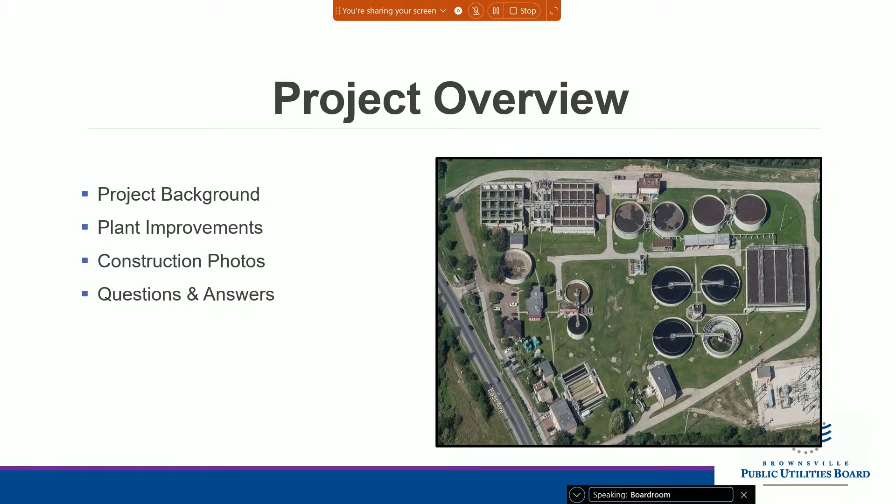Some background on the project: we had to get a good team to do these improvements and the design because it was a high dollar contract and it was critical for the treatment of our wastewater. So we got Freese and Nichols as our engineer of record. The contractor, Garney Construction, they do a lot of wastewater construction projects throughout the nation.

Freese and Nichols is a designer who does a lot of wastewater and water designs. We had DN Tanks do some improvements on one of our digesters that had a large vertical crack. Raba Kistner was our geotech lab on the project, and they did all the materials testing and quality assurance for us. Our inspector was David Betta.

The contract amount was $5.4 million with a contract time of 550 days. This project was funded by Oakland Union, partially funded by the Oakland Union Power Plant decommissioning.

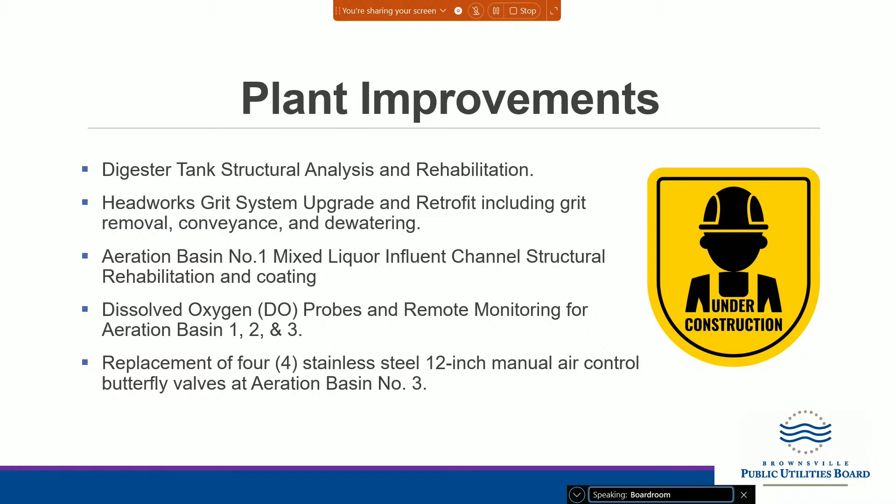The plant improvements included structural analysis and rehabilitation of one of our digesters. The headworks grit system was improved with additional equipment to improve grit removal. Aeration basin number 1's influent channel was starting to differentially settle, so we anchored it down with helical piles to stop that settling. In aeration basins 1, 2, and 3, we introduced dissolved oxygen probes to make sure the raw sewage and return activated sludge had the proper amount of oxygen needed for decomposition. We also replaced four stainless steel 12-inch manual air butterfly valves to shut off and open the valves for air introduction.

So here are some photos and the layout, again of the South Wastewater Treatment Plant. On the left you'll see aeration basin number 1, where we installed the dissolved oxygen probes, with aeration 2 to the right of it. In the middle is our headworks, which removes the large particles that come in through the sewer, as well as grit, which is sandy material, pebbles, and small fragments.

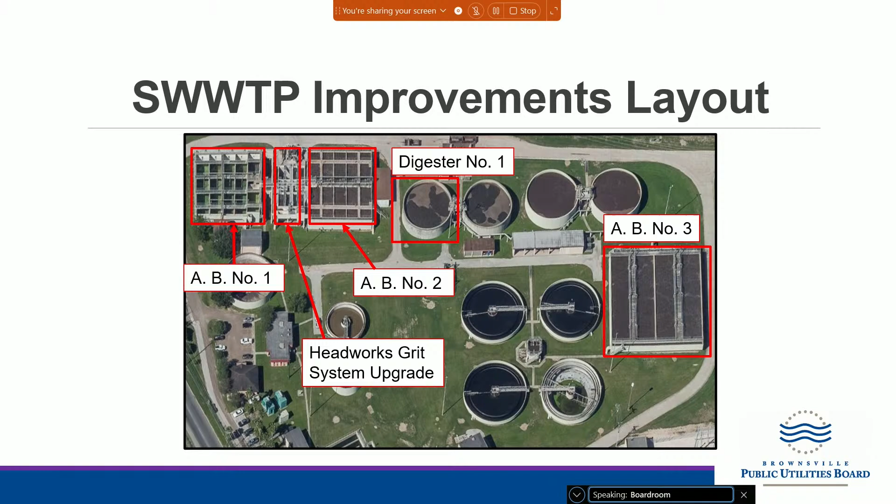On the right you'll see aeration basin number 3. Digester number 1 is outlined there. We have 4 digesters; only this one displayed that large vertical crack. That tank, for representation, is about 30 feet high. You'll see on the right this crack that was discovered a couple years ago—it wasn't like this originally. The contractor had to go in and chip out the concrete wall to make it larger, because you can't introduce small amounts of concrete—it's not strong enough and won't bond to the concrete.

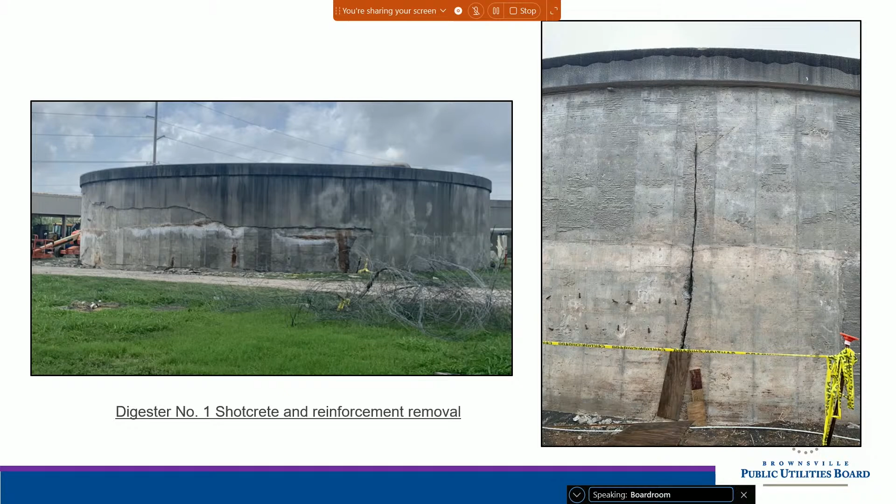On the left, they were removing the existing reinforcement, which were bands about 1/8 inch in diameter, spaced about 2 inches on center. This is what the designer recommended: about 3/8 inch diameter tendons, anchored on both sides of the tank and then post-tensioned. This is what's containing the tank from the hydrostatic forces inside.

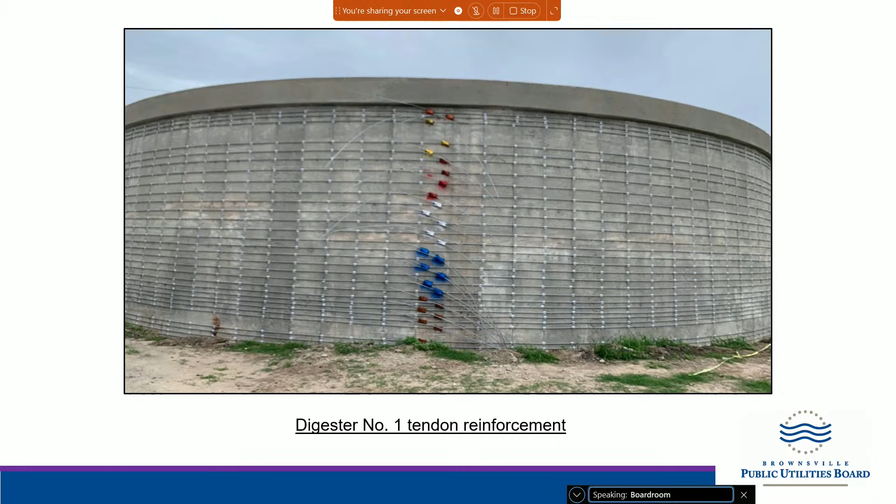This is our end product on the outside. After the tendons have been post-tensioned, it's covered with shotcrete and painted. On the inside, we had to coat it as well to maintain a good sound concrete.

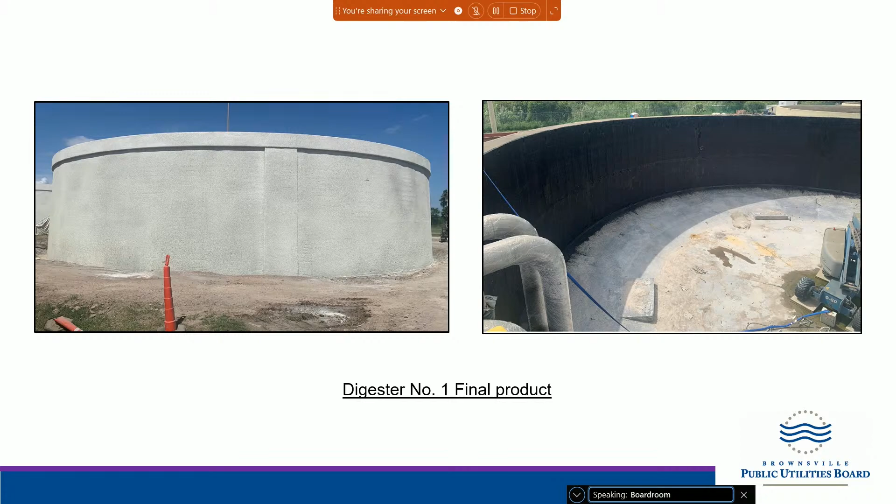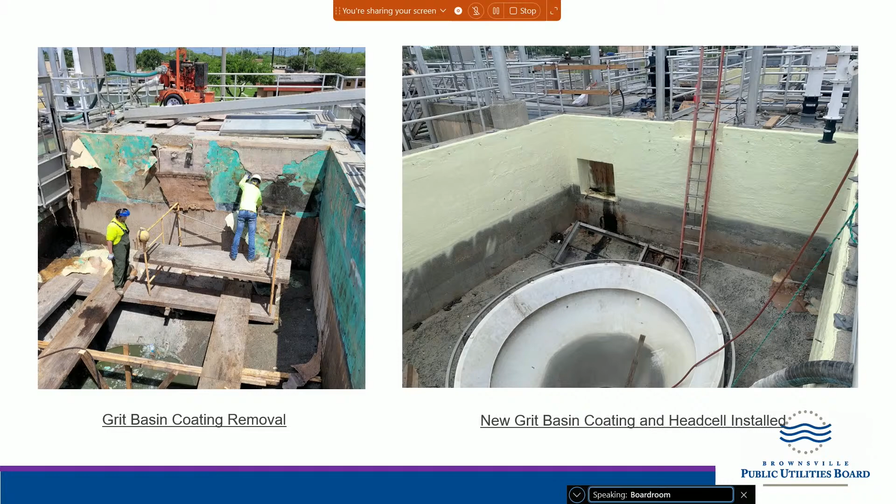This is one of the 4 grit basins. On the left, when we removed some of these water control panels, we discovered that the protective coating on the concrete was peeling off, so it was in real bad shape. We had to coat it, and you'll see it on the right side—about 1/4 inch in thickness. The white object in the center on the right is our head cell, which creates a vortex and separates the grit toward the center where it's then pumped out.

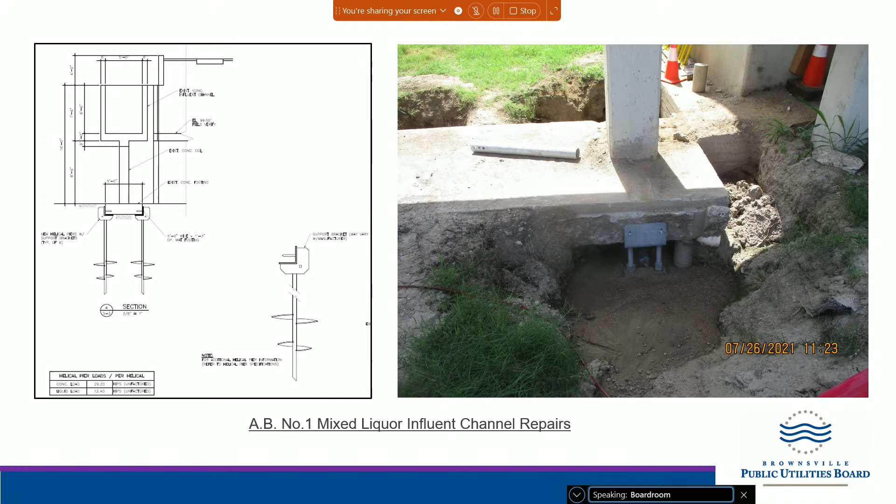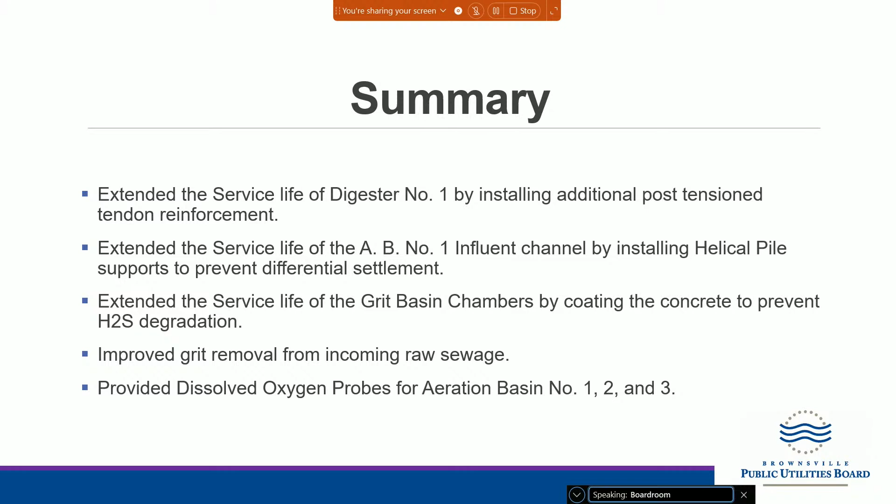In summary, this project, even though it was a high dollar amount, really helped out the south plant. It extended the life of many pieces of equipment—digester number 1 by 30 or more years, aeration basin number 1 as well. The digester now has about 30 years of extended life.

So, any questions? You said this took 2 years? The project was 550 days, from the time we noticed the crack. Was there any leakage? No, we noticed the crack a couple years ago. There was no leakage because the crack didn't go all the way to the inside, it was a superficial crack. We had to make it larger so we could put new concrete in, but there was no leakage. The reinforcement on the inside is fine.

So when you showed us the picture of those tendons, and then the final product, were those tendons taken out, or did they lay that concrete over them? So they put the tendons and then they shotcrete it, putting a layer of concrete on the outside that protects the tendons from corrosion.

The other question I had is, the engineer and the contractor, are they from the RGV, or out of the area? So Freese and Nichols are nationwide, and Garney, I don't know if they're from Texas, but they do work nationwide as well. They're both very reputable contractors and engineers.

Anybody else have any questions? Yeah, I've got a question. One of the last things you said was it extended the life by 30 years or more.

That's very important to the consumer. Hearing your report is probably at a level much more engineer-centric than mine. Is there an opportunity, excuse my language, but in Joe's six-pack language, that we could let the public know we have extended the life of -- you said you were on something, I'm sorry I didn't write that down, but I thought it's very important here. Extending the life of anything mechanical, anything that serves the community, for an additional 30 years -- there's a cost involved, but what would have been the long-term cost if we hadn't taken care of this? I think those things are real important, not just for this table and this committee, but for the public. I know the language there is at a level much higher than I am able to comprehend, and probably the average person too.

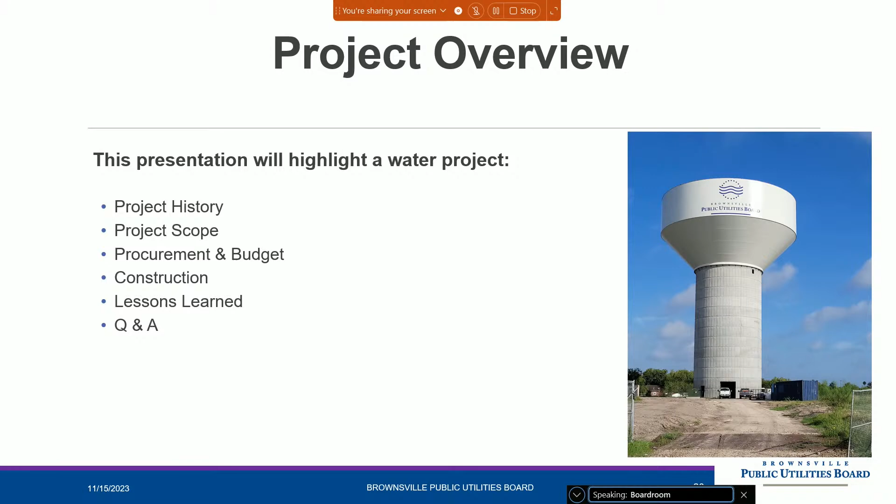The project overview today will go over some project history on our elevated storage tanks, project scope, procurement and budget, construction, lots of photos and a couple of videos, and then a few lessons learned on the project, as in any other project, and then Q&A, any questions you all may have.

Project history: as a lot of people probably know, the BPUB water distribution system has several elevated storage tanks throughout the city. We specifically have 4 elevated storage tanks, and back in the day they used to label them by numbers - EST for elevated storage tank, number 1, number 2. We continue to have the same sequence of numbers even though some of those tanks are no longer in existence. For example, we had the Southmost Elevated Storage Tank number 4.

That was the one that got demolished, and I'll explain more later. It had a capacity of 1 million gallons. We also have the UTRGV Elevated Storage Tank number 5, which everybody knows by the McDonald's as you enter the university. That also has a capacity of 1 million gallons storage.

Alton Gloor, EST number 6, is on East Alton Gloor close to the expressway, with a capacity of 2 million gallons. And Martinal Tank - maybe not as many people are familiar with that name - is located just north of our Robindale wastewater treatment plant off Central Avenue and FM 802. That has a capacity of 2 million gallons as well.

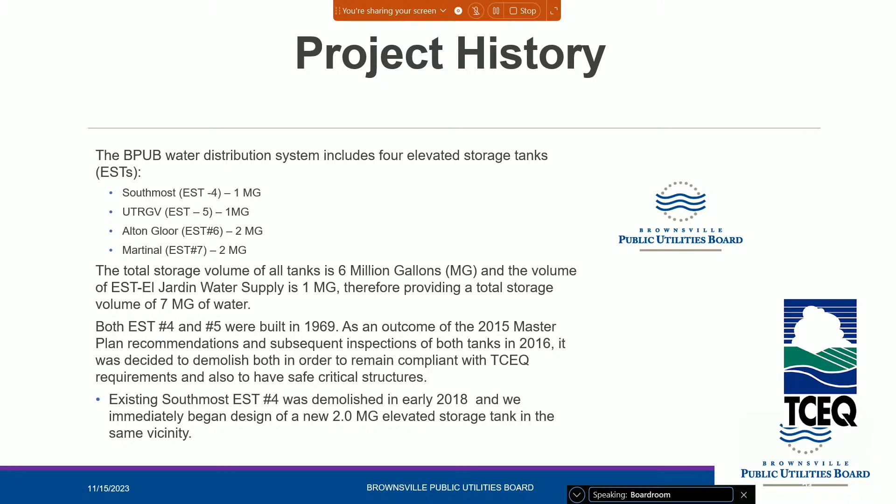And everybody asks about the UTRGV tank - one of the requirements by TCEQ is we couldn't demolish both at the same time. So the UTRGV tank is still up, but we need to begin plans to demolish that one, and we should be demolishing it by late spring of 2024. Nothing is going to replace it at that location, because the one we just finished constructing already replaces it in capacity.

To give you an aerial view of the tank locations - at the very top, the north end, we have the SRWA. That's a ground storage tank, flush to the ground, using pumps to push water into our distribution, versus an elevated tank which uses gravity flow to distribute water.

Alton Gloor is on Alton Gloor and the expressway, and the Morningside one is in the center of the page on the east side of the city. The UTRGV one is further south, and the one in yellow is the brand new one - the southmost 2 million gallon elevated storage tank.

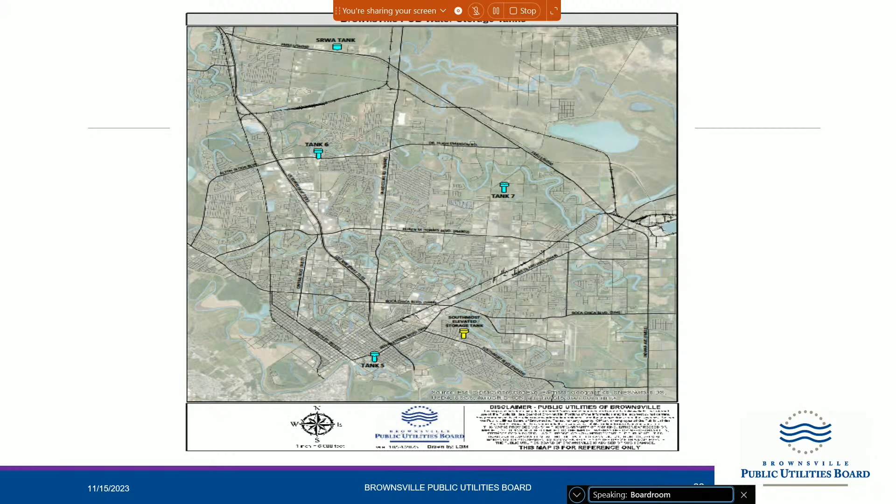This is the property we purchased - 4.4 acres, a couple blocks in along 30th Street from Southmost Boulevard, very near where the old one was. One benefit is we looked specifically for property nearby so the water lines needed to tie into our main distribution weren't too far away.

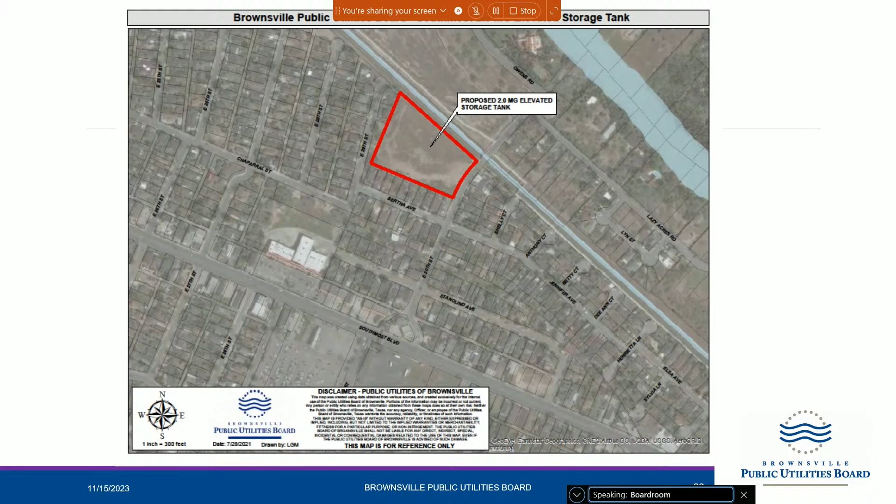This was the closest property that was really available - as you can see, the rest of the Southmost area is pretty populated. An interesting fact: this property was purchased from the late Judge Saravia, a longtime justice of the peace, who sold this property to the utility.

Procurement and budget of the project. This design team was the same as in Ricky's project at the South Plant: Freese and Nichols, Dunham Engineering, and Square E Engineering. Square E Engineering provided the electrical work, while Dunham Engineering provided civil site work and a lot of the welding and structure.

Testing - the project was bid on July 21st, 2021, coming in at $5.782 million by Landmark Services. Landmark Services has, for many years, constructed lots of elevated storage tanks throughout the nation. They're housed, I believe, in mid-Texas near Dallas, but they build tanks everywhere.

They actually built the one on our Morningside tank as well. The project timeline was originally 1 year and 4 months, and we gave them an additional 10 months due to scope of work that we added, which I'm about to go over.

Change in scope of work is done through what we call change orders - changes in the contract amounts. Originally this project was not designed to have an active mixing system - none of our other tanks have this. This is a more modern approach, as an active mixing system continuously keeps the water fresher by agitating it inside the tank.

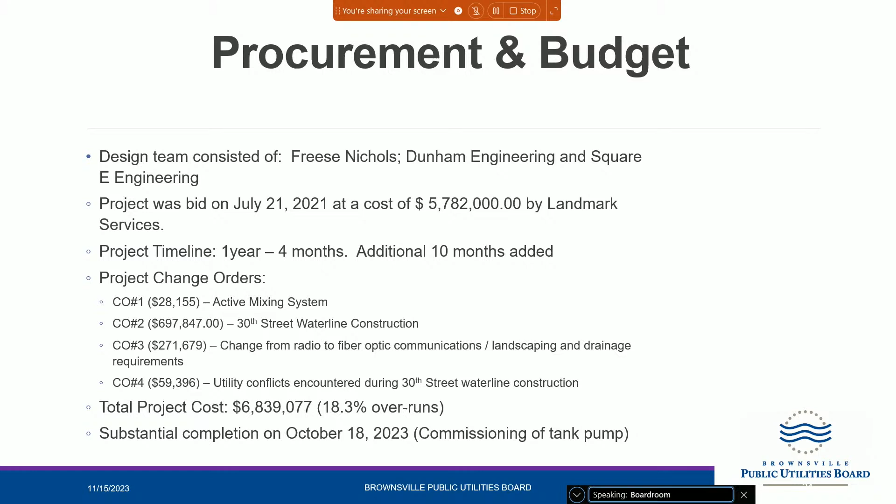The lead construction managing team, of course, was Freese Nichols. I served as the project manager, and the project inspector was David Vera. Many departments had to be involved, including BPUB. The larger groups were the SCADA group, the electrical transmission and distribution, and our water wastewater operation.

Crews brought in the fiber from the South Wastewater Treatment Plant. The fiber travels aerially from pole to pole, and when it reached our property, it went underground all the way into the tank. Of course, there are lots of departments involved.

A big one was purchasing. They assisted tremendously - when we were doing the water line along 30th Street, that's when PVC was in a huge shortage of pipes and fittings. In order to save time and not delay the contractor, purchasing assisted us with obtaining the PVC pipe.

You're going to see a map showing numerous traffic control points, lots of roadway closures, and lots of notifications for those who lived in the area. The PR department played another big task in putting out notices to the public, and of course the financial department assisted us with the funding and so forth.

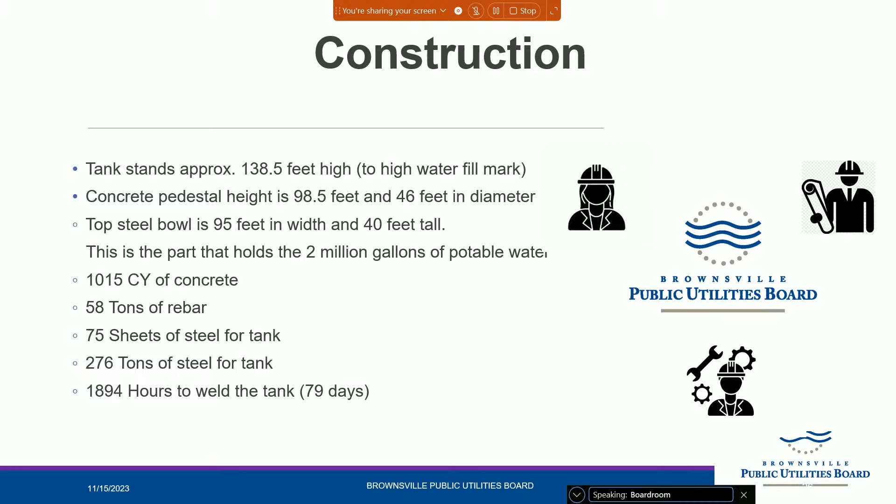The tank stands approximately - let me go to the next slide so you'll be able to see this view instead. This is a concrete pedestal. The pedestal is the trunk of the tank. It's hollow, you'll see photos of it as well. Basically what holds the 2 million gallons is that top portion, or the bowl as we call it. That top portion is made of steel.

The overall tank is measured from the bottom to the high water mark. The high water mark is right above the welcome sign. That portion of the structure is 138.5 feet tall. The concrete pedestal portion is 98.5 feet tall, with a diameter of 46 feet wide. The top bowl that holds the water is 95 feet wide by 40 feet tall, and that's the part that holds 2 million gallons of potable water.

There were 1,015 cubic yards of concrete poured, 58 tons of rebar, and 75 sheets of steel for the top portion of the tank. All of the steel totaled about 276 tons, and it took about 1,894 hours of welding, which is pretty much like 79 full days of welding on the tank.

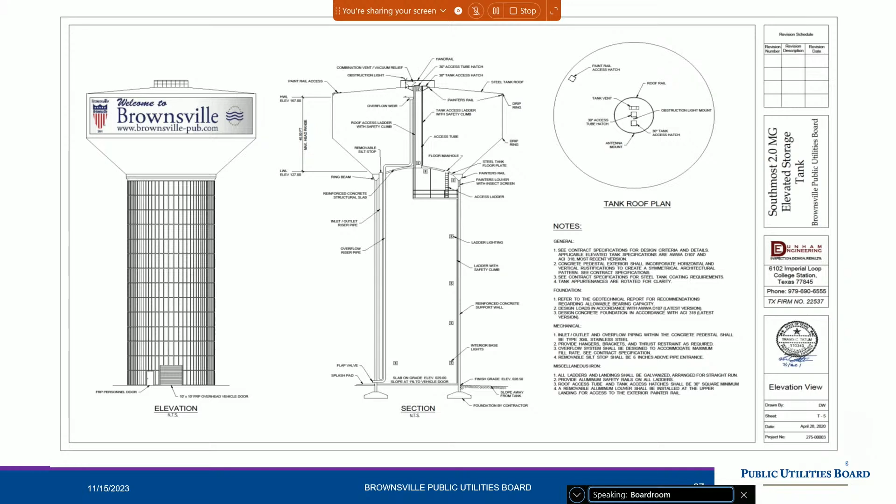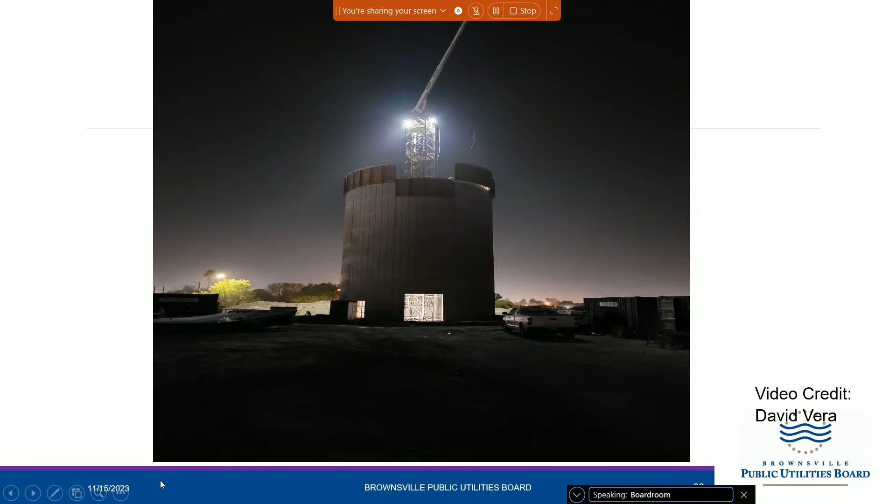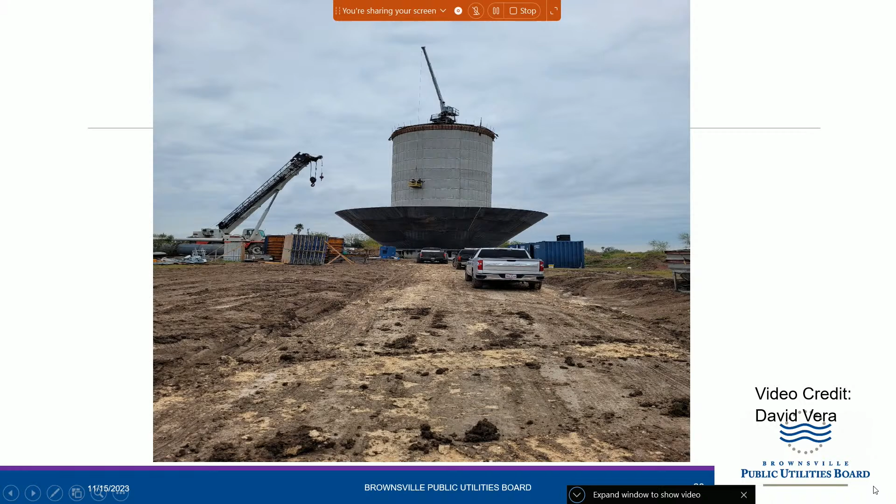Now I'm not sure how to play the video. Oh, there we go. I think we're having... but the volume, remember? Still a little bit high? I think it worked last time, they were able to do it. No? Okay, we'll go without sound. Technical difficulties, let me see.

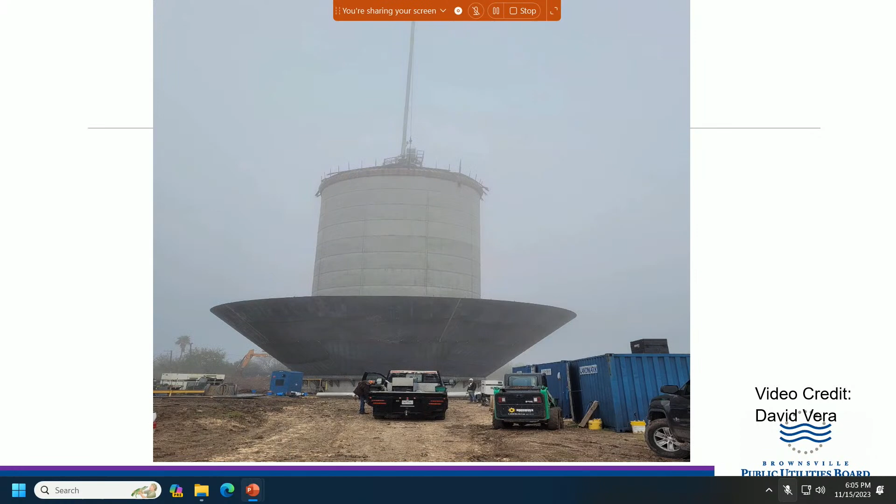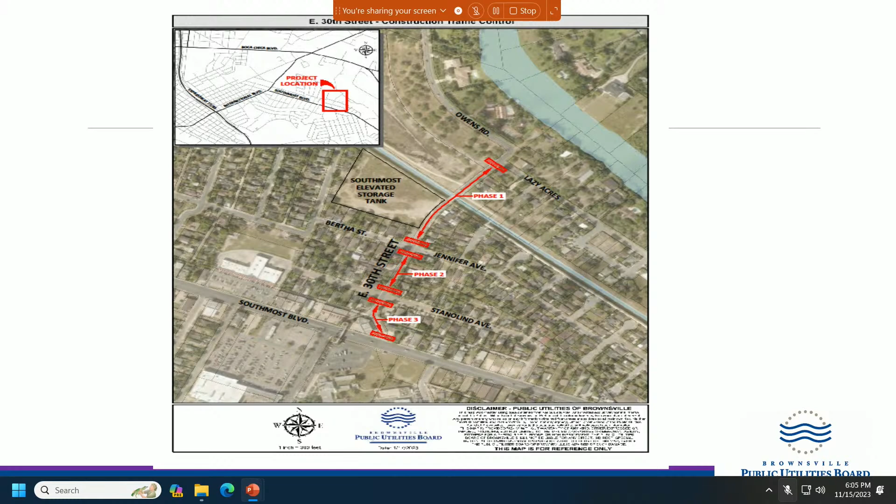Moving on to the 30th Street water line construction. This is just an overall layout of where this water line was constructed. This is the property where the tank was being built, and we had to connect from here, from the tank, to Southmost Boulevard, where our main other water line, another 16-inch water line, was going to feed water to the tank.

This was done in phases, so we had to close the roadway in phases and detour traffic around. Coming out of the tank, there's a 20-inch diameter water line, and right where it hits 30th Street, it becomes a 16-inch water line.

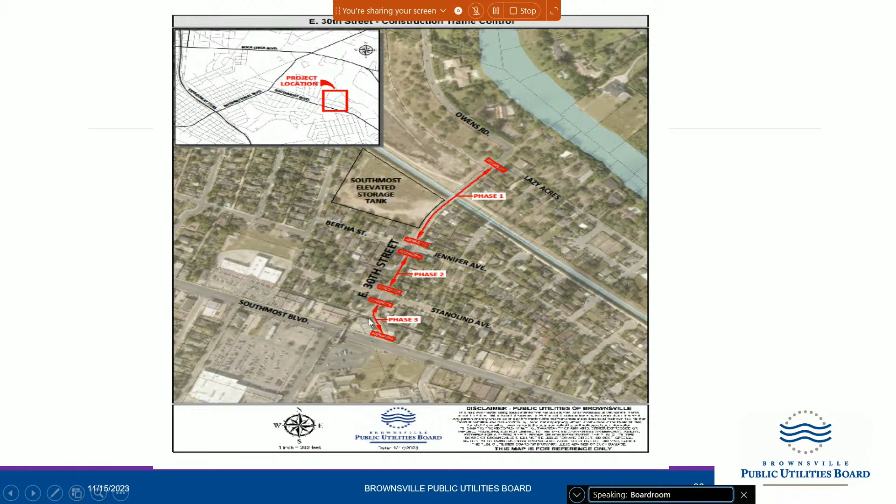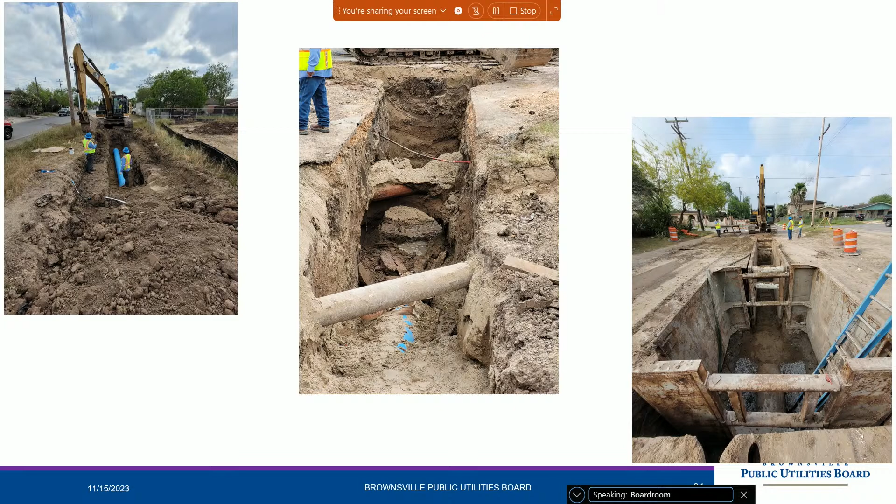What was difficult about this was not necessarily along 30th Street, but Southmost Boulevard is a TxDOT highway, so we had to bore that under the street. It also impacted the parking lot of Cromack Elementary School, where we were doing the joint of the two water lines. So we had to get special permission for a temporary easement from BISD, with a bit of delay since BISD required us to wait until school was out so we wouldn't impact traffic in their parking lot.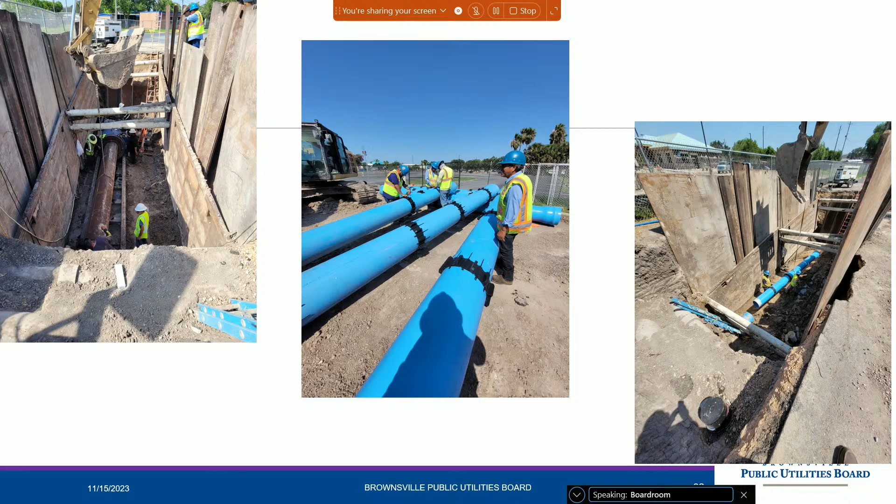Overall, the contractors did a really good job, given that it was extremely deep underground. What you see in the middle photo is that they join the pipes together above ground, and in the far right photograph they start placing it down into the excavated hole and then start pushing it. That's what we call a bore under the road - they hydraulically force the pipe underground without having to tear the pavement above it. This is a steel casing that they push it with, shown in the photo on the left.

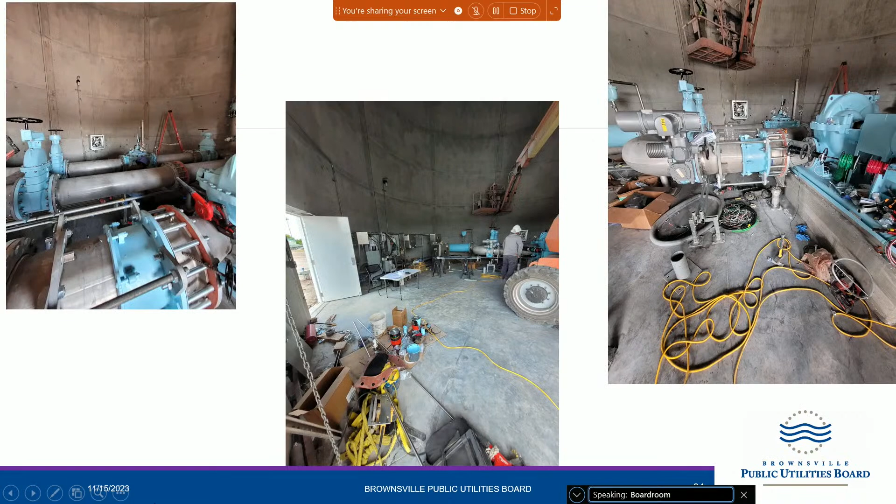This is the inside of the tank. I think those that attended last week's ribbon cutting were able to see what the inside looked like. This was still pretty messy under construction, but those are the main pumps shown here, and the middle area has all of the electrical panels and controls so that plant operators can have communication and control of the tank. Everything is done remotely.

Just some photographs of the tank. The tank is operational right now, but there's still substantial landscaping to be done. We got some delays due to the rain this last week, but there's landscaping, irrigation, and some other grading to be done at the site.

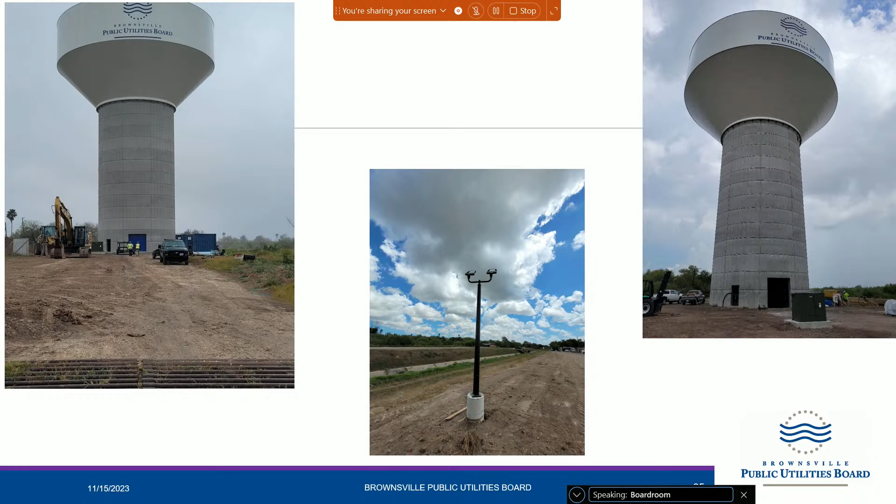And again, this is another video. It had nice music, but we're going to go without the music.

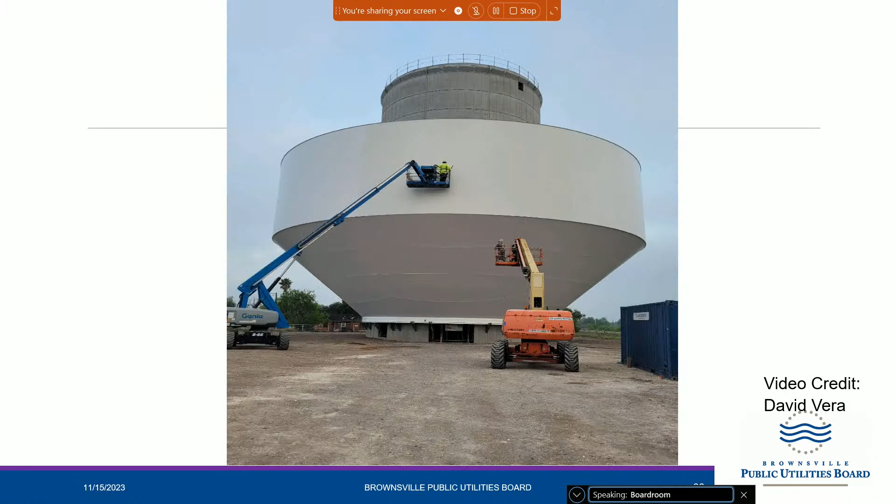Marie, in those photos, that tank is painted? The storage tank is painted? The bowl part, is it? The bowl is part of it. The bowl.

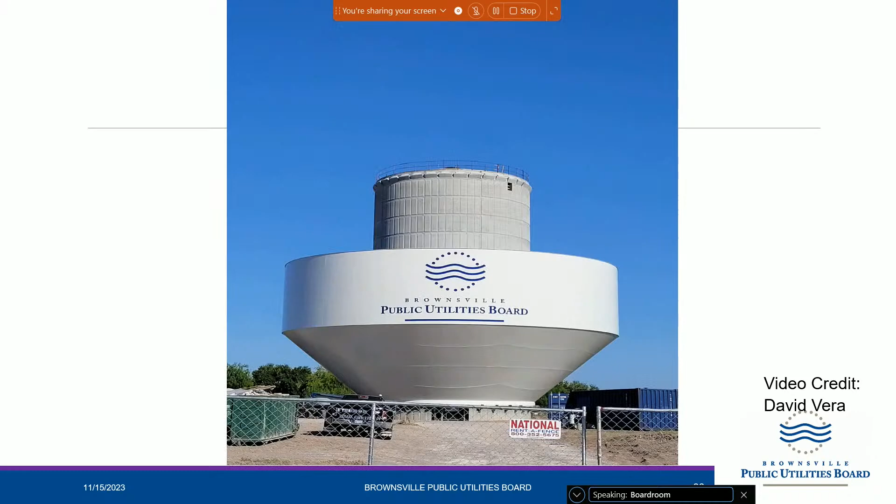And that's when they were stenciling the BPUB logo. They paint it, they seal it, they paint and seal everything when it's on the ground, and then they hydraulically lift the entire bowl. Once that bowl is up in the air, they complete the dome portion up in the air to close it off.

Pump commissioning and training. This is just two photographs of, we had quite a diverse group. We had to have all of our water and wastewater mechanics and plant operators on site so that they could familiarize themselves with what valves they needed to know, what shuts off, and what water lines go up into the tank.

Another thing we did that day that turned out perfectly was with the pressures. They bumped up the pressure of the water leaving the tank, and we had to coordinate and check the pressures within our distribution system to make sure everything was holding fine. Everything turned out okay.

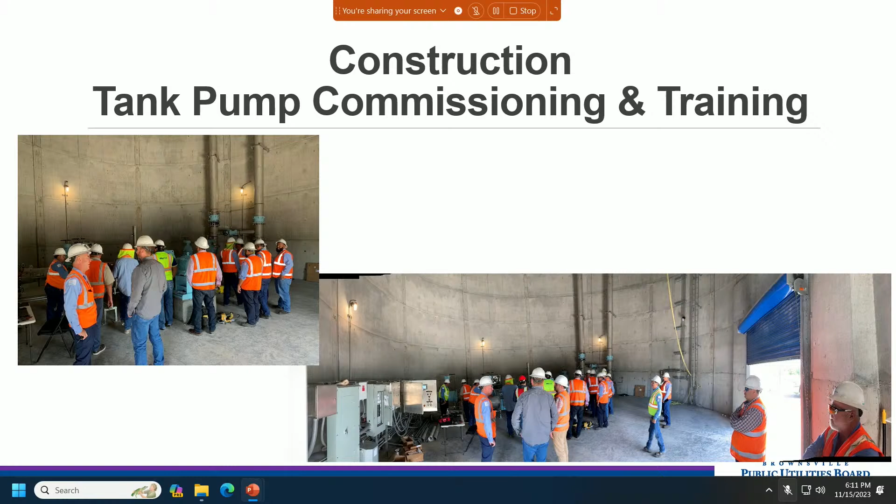So, lessons learned. A couple of lessons learned on this was the 30th Street water line. We could have constructed this before the tank, but that would have meant constructing it during the pandemic. At the time, we didn't anticipate there would be scheduling conflicts and material shortages right when we got out of the pandemic, which is when there was a huge shortage of PVC pipes and price increases on every aspect of it.

There were also conflicts with BISD. In hindsight, if we would have constructed the line the summer before, we wouldn't have had the four or five month delay due to having to wait for summer school to be out to do the work adjacent to Cromack Elementary. We could have also originally bid the 30th Street water line project together with the actual tank from the start instead of keeping them separate.

But one of the biggest positive things that came out of this is that we bid it right in the middle of the pandemic. If we would have waited six or eight months longer, a project of this size, which came in at 5.8 million, we were actually seeing bids in other sections of South Texas where these size tanks were coming in at $8 to $10 million, and they continue to be that high. So those were just a couple of the lessons learned.

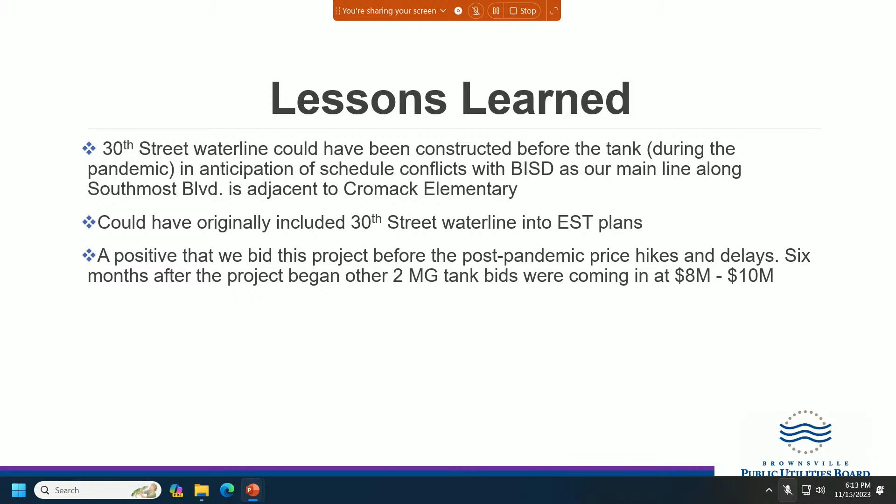So I'll entertain any questions.

I have a question. First of all, my remark is, thank God for engineering services. That you guys can build something like this just boggles my mind. I'm a lawyer, what do I know, right?

But you stated in your report that the EST has a storage volume of 2 million gallons. Now, what's the total capacity that the master plan calls for in storage capacity to service this area? Do you know what the storage capacity should be? What does the master plan say? Does it say we should have a facility that would allow us storage capacity and volumes of water to service the area, perhaps in 10 years, growing from what it is today to this number?

It's basically TCEQ that regulates that, so we are meeting what the TCEQ requirements are.

Right now we're in the process of planning. We have a consultant already working on our next master plan, and Brownsville continues to grow tremendously. It takes about 18 to 20 months for these master plans to be completed, and I can almost guarantee that in 18 months, when we review and present this new master plan, it's going to call that we're going to need an additional 2 million gallon elevated storage tank, and it's going to have to be on the northwest side of town.